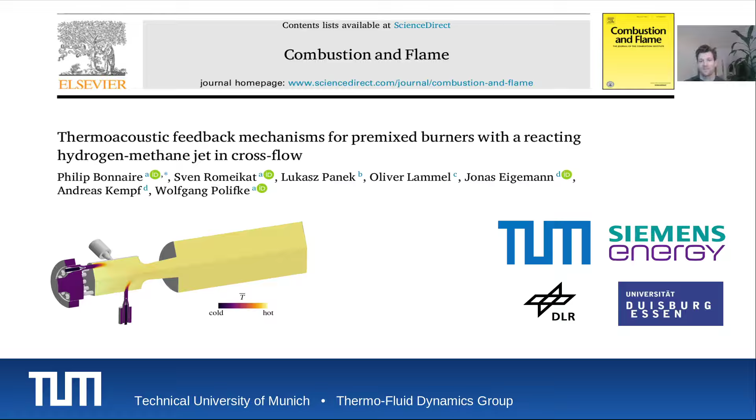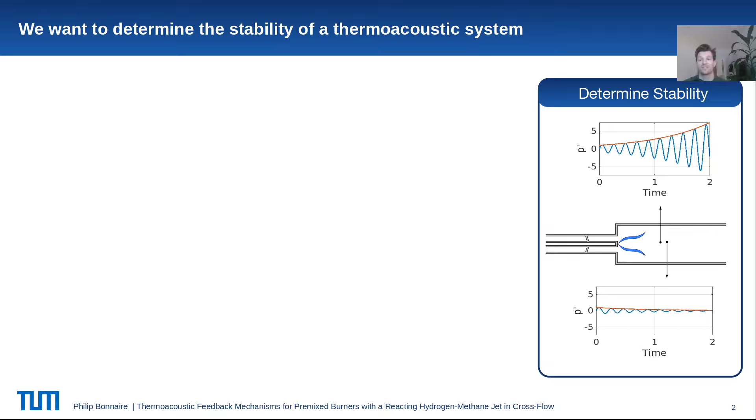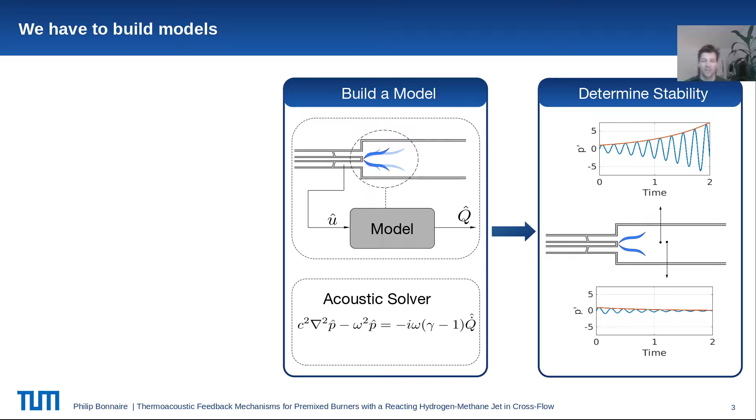So what is thermoacoustic research all about? At the very end we want to determine if a system is stable or not. We want to determine if pressure oscillations will grow or if they will decay. So what do we have to do in case we don't want to test all operation conditions? We have to build models. Normally we determine a flame model and then we use this flame model in an acoustic solver to close the equations. To be able to determine a model, we have to be well aware of the feedback mechanisms.

And even though this is the last year of my PhD, it took me quite some time and I had to read the thesis of my former colleague Moritz Merk to understand that this is the core of our work.

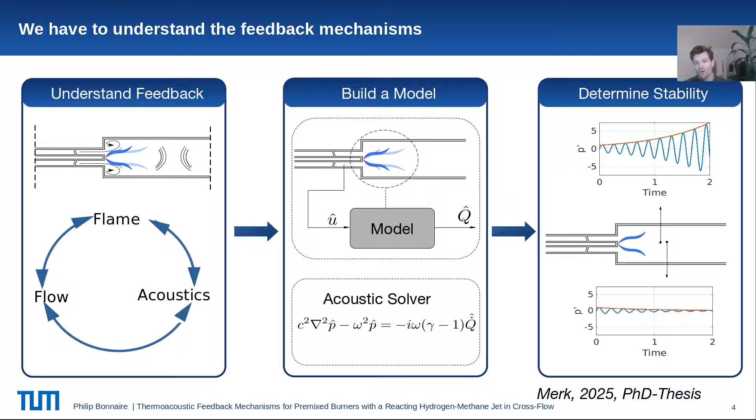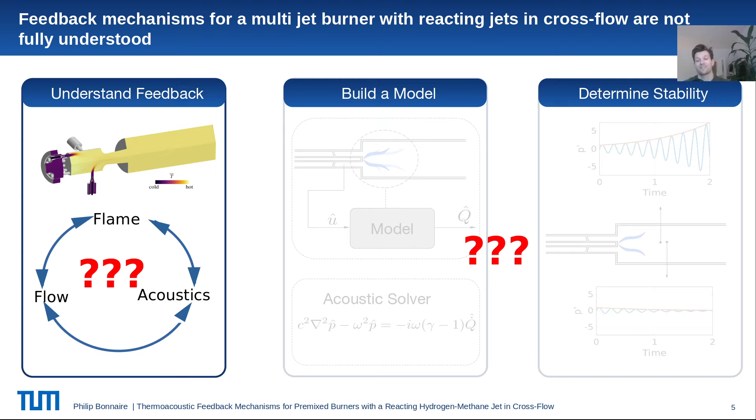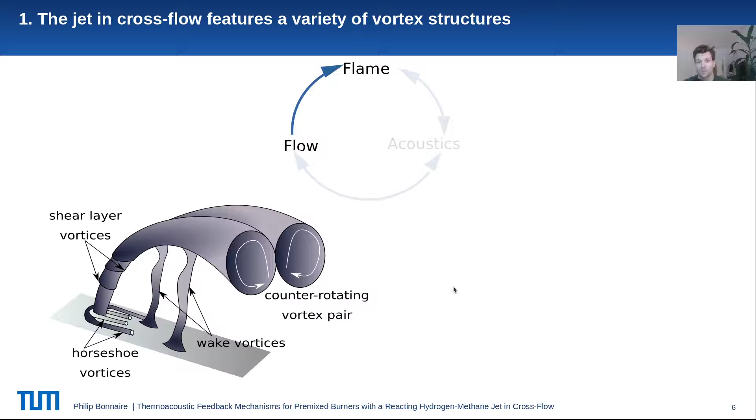So the problem is, what about models for a reacting jet in crossflow being exposed to high frequency dynamics? We don't know about the feedback mechanisms. They are not well understood. Therefore, we cannot build models, hence we cannot determine stability of the system. Why is it that complicated? First of all, the reacting jet features a multitude of vortex structures, and therefore it offers plenty of opportunities that the flow can interact with the flame. And think about the interaction between acoustics and the flame. For example, if we have a transversal-longitudinal mixed mode, the jet encounters forcing from all sides, parallel to its axis, orthogonal to its axis.

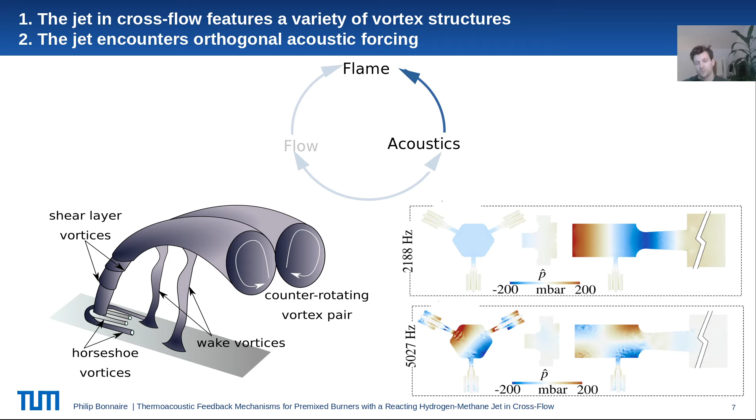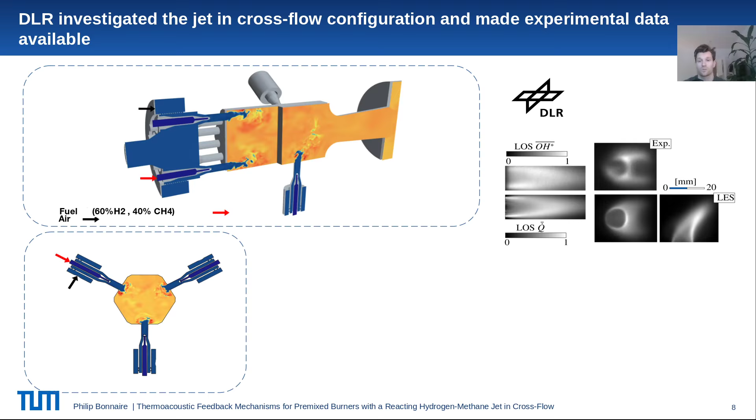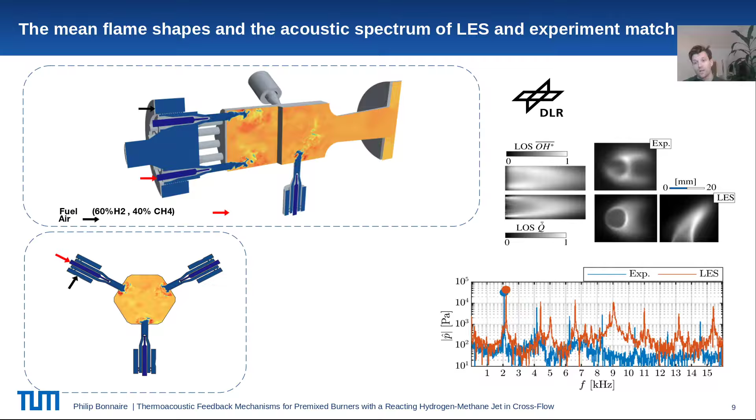Luckily, the German Aerospace Center investigated a configuration with a jet in crossflow and they made the experimental data available to us. Hence, we could compare the experimental flame images with those images that we produced with large eddy simulation, and we could also compare the acoustic spectrum that we got from those experiments with our large eddy simulation, and they match quite well. For further analysis of the large eddy simulation, comparing the results to the experimental results, I refer you to the paper.

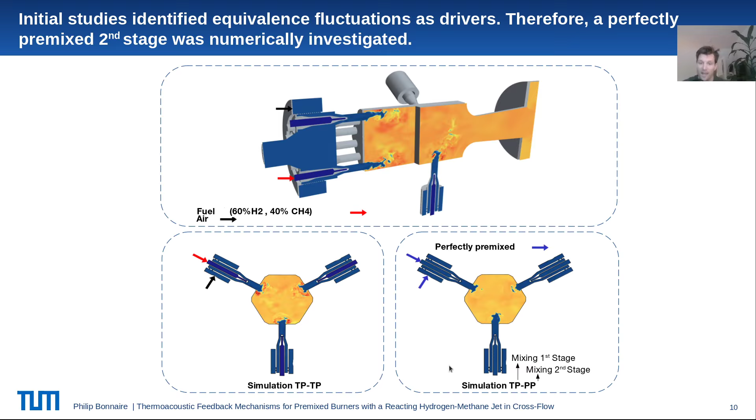Both of those configurations showed self-excited thermoacoustic instability. On the left-hand side, this is the first longitudinal mode that was also observable in the experiment. And I want to highlight the frequency, around about 2 kHz. And the simulation with the perfectly premixed second stage showed a transversal longitudinal mixed mode, modulating at much higher frequency, around about 5000 Hz.

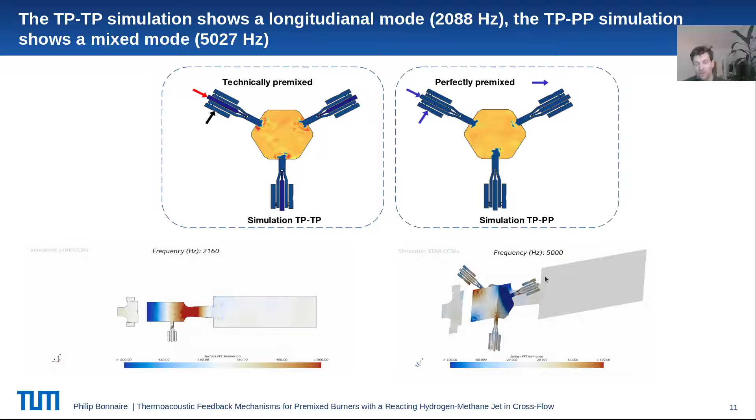So, as a subsequent analysis, we had a look at the flame dynamics. I want to quickly explain the procedure that we applied here. First of all, we applied modal decomposition techniques. Hence, we applied a dynamic mode decomposition. We pick only the dominant mode and the zero frequency mode and use those two modes to apply the inverse transformation back to time domain. So this is a very effective filtering method. The simulation TP-TP showed strong bending of the jet due to acoustic forcing. The longitudinal forcing, orthogonal to the jet axis, forced the jet to exactly display that kind of phenomena. The simulation with the perfectly premixed second stage showed a strong shear layer modulation.

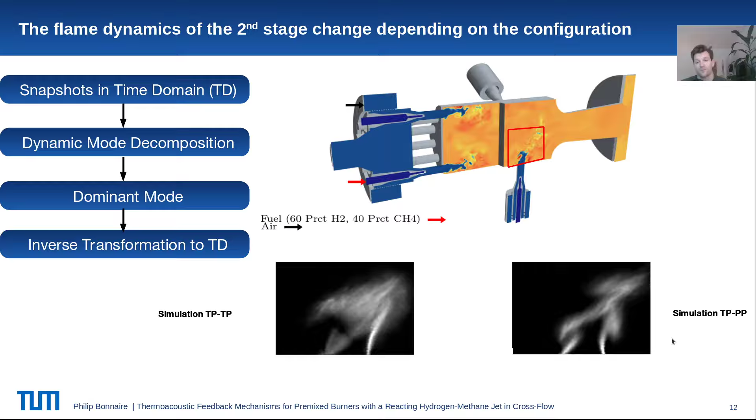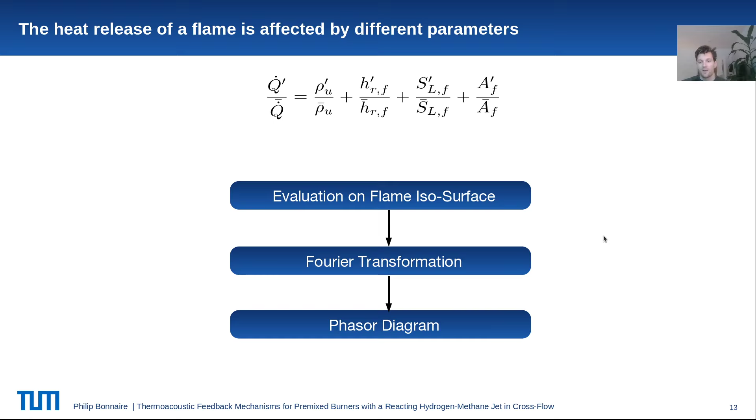The next question we wanted to answer is what kind of interaction mechanisms are present? The heat release is affected by different parameters. First of all, we have the density of the unburned gases, there's the enthalpy of reaction, we have the flame speed and the flame surface. We evaluated those quantities on an isosurface, applied a Fourier transformation, and then had a look at those Fourier quantities in a phasor diagram. This phasor diagram gave us the answer on the phase lags between those quantities. And here they are. I just want to mention that we displayed equivalence ratio fluctuation instead of the enthalpy of reaction, because equivalence ratio is directly measurable. For the simulation with the technical premixing, we see that flame surface modulations are in phase with heat release modulations, as well as equivalence ratio fluctuation and the flame speed. For the simulation with the perfectly premixed second stage, we only could determine the density fluctuations are in phase with heat release modulations.

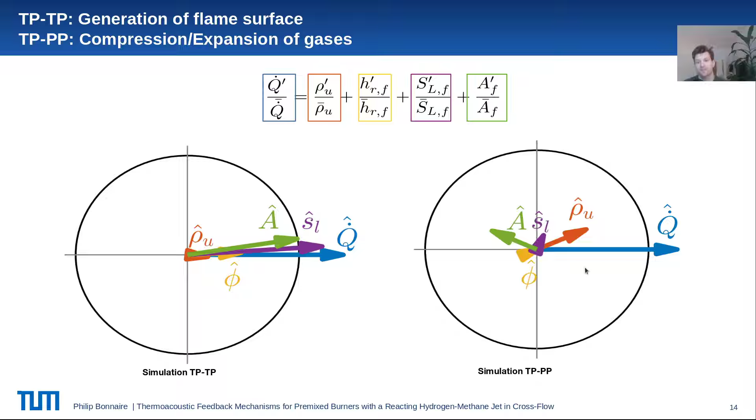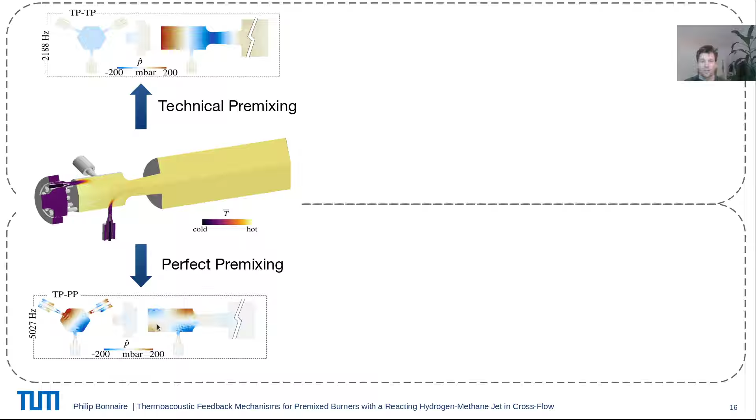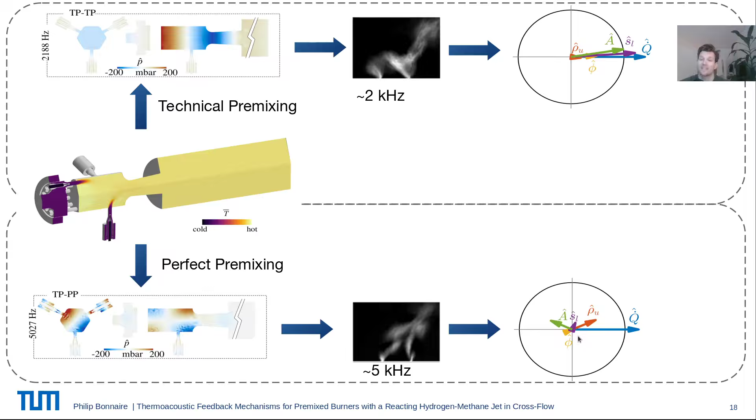So let's sum up and let's draw conclusions. We investigated a burner with a reacting jet in crossflow. There were two self-excited thermoacoustic instabilities given the operating point. First, with the technical premixing, we see a longitudinal mode. With the perfect premixing in the second stage, we see a transverse longitudinal mixed mode. The technical premixing shows strong bending and flapping of the jet at around about 2 kHz, and we can see that flame surface modulations are in phase. So the orthogonal acoustic forcing generates and destroys flame surface, as well as equivalence ratio are in phase and also the flame speed. For the perfect premixing, we see strong shear layer activity at around about 5 kHz. Surprisingly, this does not lead to flame surface modulations. We only could detect that density fluctuations are in phase.

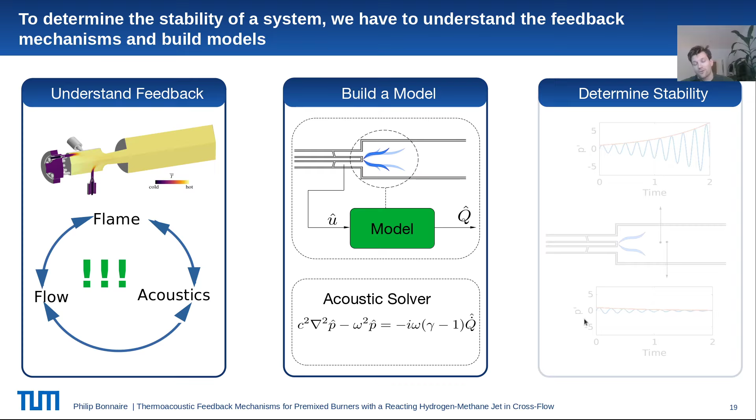Now let's come back to one of the first slides. So now we know the feedback mechanisms for a reacting jet in crossflow, hence we can suggest models. Our model suggestions are the following. For the technical premixing, we see that orthogonal velocity fluctuations might be a valuable input to a flame model, which determines heat release rate. And we want to emphasize that equivalence ratio fluctuations, even in this high frequency regime, play a crucial role. For the perfect premixing, we only identify density fluctuations in phase with heat release rate. Density fluctuations are directly linked for an acoustic wave to pressure fluctuations, and given that we know pressure fluctuations from the acoustic solver, we can close the computational loop to determine heat release fluctuations. So we suggest the model that the heat release is a function of the acoustic pressure.